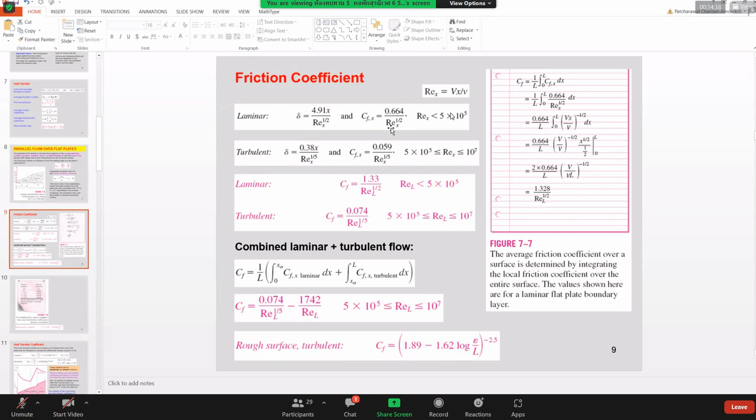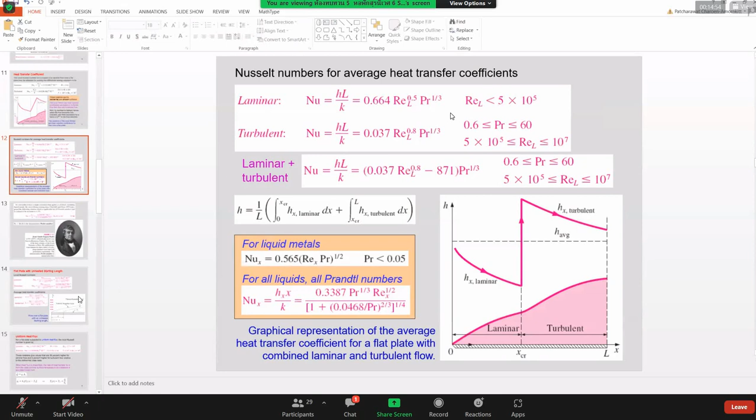The content today, I don't think is difficult, but it contains so many equations like this. Looks complex. I don't think you would like this kind of equation - doesn't seem like a good equation to remember.

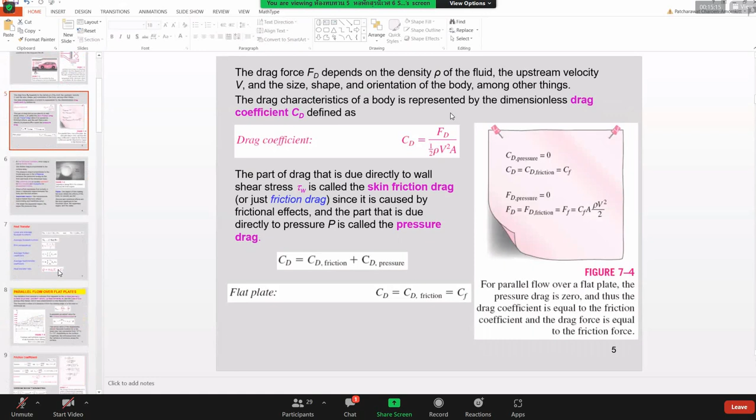And you don't need to remember it. Most of the time, when we face this - talking a bit about heat transfer in my bachelor study - we don't really need to remember this kind of equation because it's not that important. It's not like F equals MA, it's not Newton's first law, second law, whatever.

But it's the kind of empirical formula you obtain from experiments. And if you recall, I think I gave you some exercises in MEMAT to fit the experimental result to this kind of equation, to obtain the exponent and the coefficient here. It's all obtained from fitting. And if you can link your idea from MEMAT2, you will know that this is regression analysis - that's how they obtain this equation.

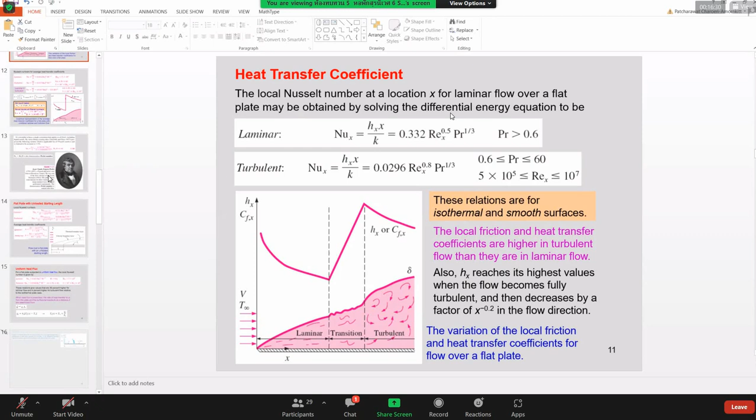I will talk more a bit about them, but just leave it here at this moment. I think you don't need to remember it because it's from experiment, and there were so many empirical formulas out there. In this book or in this lecture, we just pick a few of them.

We introduce them to make you able to know how to utilize it. It's not really important about the exact number, like this being to the power of 1/3, something like that. Because if you do research, get into your master study or PhD study, sometime you will be the one who creates this kind of relation and publishes it to the public. So studying in master's degree or PhD is about providing some solution to the public, and this is one solution that they found.

They obtained it from careful experiments, trying to help you who don't have the experimental apparatus yourself, to be able to carry out analysis about heat transfer. And it's very unique to the problem, like this flat plate with an unheated starting length. So this equation works only for this kind of problem. You cannot apply it to something else, like cylinders. No, not like that.

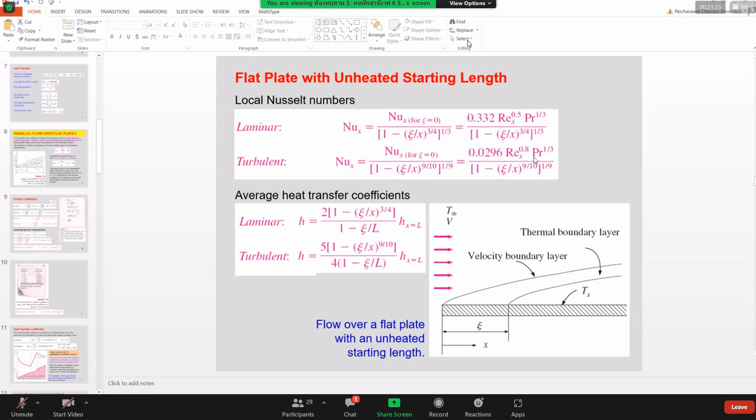Still, it's really popular if you want to study as a master's or PhD student. Maybe one day, 50 or 100 years from now, your surname will be on a book like this, and everyone will know this is the relation from - I don't know, let's say it's the 'Suryo relation,' something like that. So maybe you want to register your name into the book. I don't know.

Okay, let's come back to the topic we want to learn today: external forced convection. External, so not internal - it's the opposite thing. You may know external flow, right? Here we deal with external flow together with forced convection, so that's why we call it external forced convection.

The real-life application we can think of at this moment would be turning on your fan and putting it against you - there will be a wind that flows over you, right? That is forced convection, and it's external flow over your body. Okay, let's do it.

What we want to learn from this chapter is, first, we should be able to distinguish between internal and external flow. I don't think it's so important for you guys because you already learned fluid mechanics last semester, so I'm pretty sure you know what internal and external flow are. Based on the previous session, I understand you remember fluid mechanics really well, because there were no questions at all.

So I'll talk about it just a little bit. The objective is also to get an intuitive understanding of friction drag and pressure drag, and then look at average drag and convection coefficients in external flow - this is very close to fluid mechanics. Then we evaluate the drag and heat transfer associated with flow over a flat plate for both laminar and turbulent flow. Here we deal with heat transfer already.

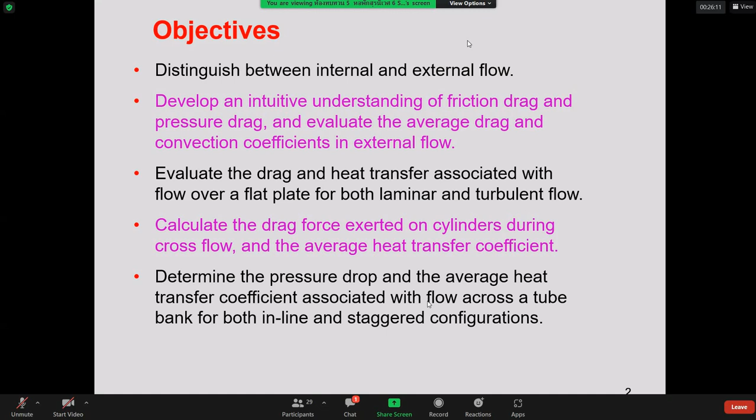Okay, so now let's start. We know that we encounter or face a lot of flow that flows over a body. It's very frequently occurring in practice, and in such cases we have drag force—we have to face a drag force. We are also facing something like a lift force, which is the upward force that makes the airplane fly.

But then, as you can imagine, in this kind of geometry, how could you make an analysis? Of course you need to use numerical experimentation, right? Because if you do a real experiment, you need to create the airplane, maybe a smaller size, but still you need to create something and do the experiment, and you need the experimental apparatus to do that. And that is kind of costly.

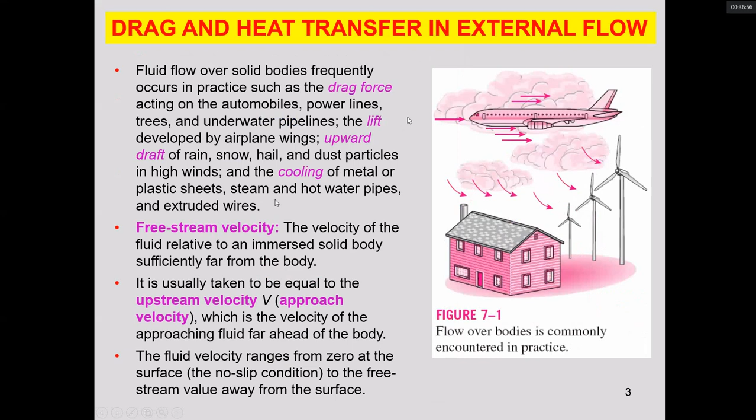So here is how you calculate for the drag coefficient. If you have the experiment, you measure the force. You cannot measure the CD directly. This is the way that you need to think about your experiment: you cannot measure CD, but you can indirectly calculate the CD from the force that you measure. So here is basically 1, 2, 3, 4

different parameters that can influence your CD. So if the FD is the measured value, the error could happen due to the experimental apparatus or the accuracy of the apparatus. Again, for the rho, this is very important. As you know, the rho or density changes with the pressure, with the wind speed. If the wind is too strong, the pressure changes. How could you deal with it?

So there are so many parameters that can influence the CD, and also their surface area. I don't think measuring the surface area is simple—not something everyone can do easily. It requires some sophisticated method to measure the frontal area and put it here. The frontal area is okay if you have the drawing in CAD software—you can probably do the analysis and obtain the A easily. But to measure it experimentally, I don't think it would be that easy.

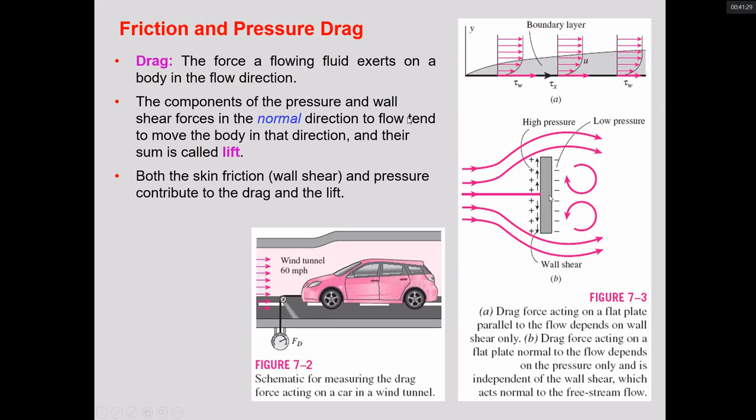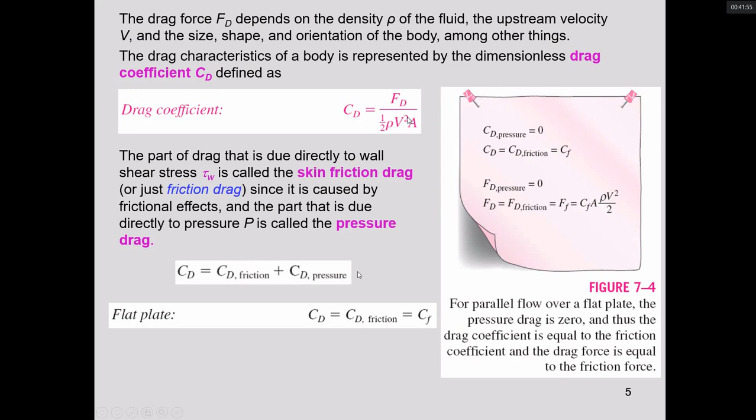For low Reynolds number, most drag is due to friction drag. Friction drag is proportional to surface area. The pressure drag is proportional to the frontal area and the difference between the pressure acting on the front and back of the body. Pressure drag has a really high impact when you have a blunt body like this.

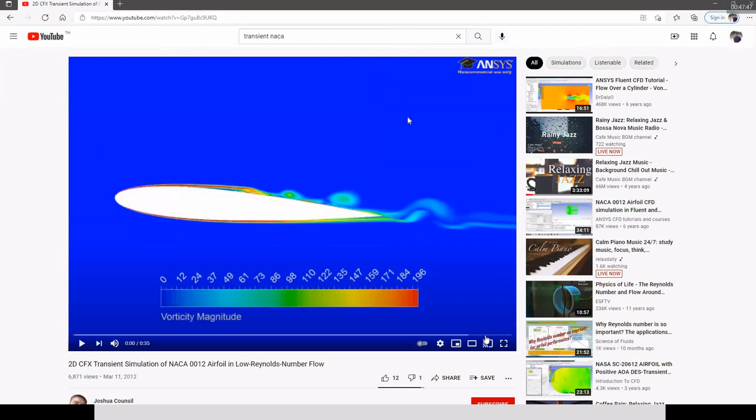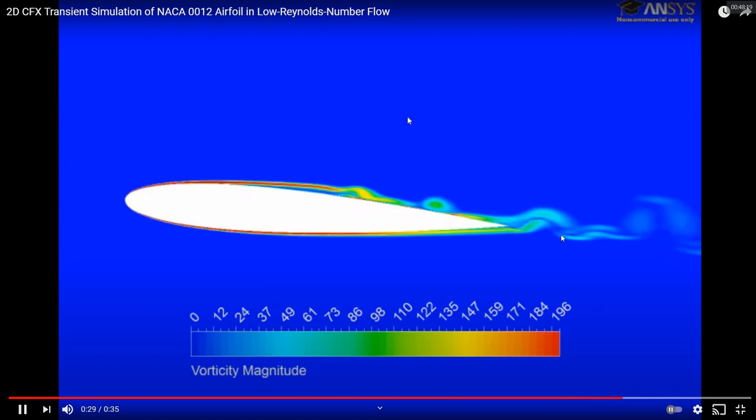Okay, so yes, this is the one — I did something like this. You can simulate this kind of thing, the flow generated here. So this is actually the wing of the airplane, but this isn't so interesting in my opinion because the speed of the flow is very small.

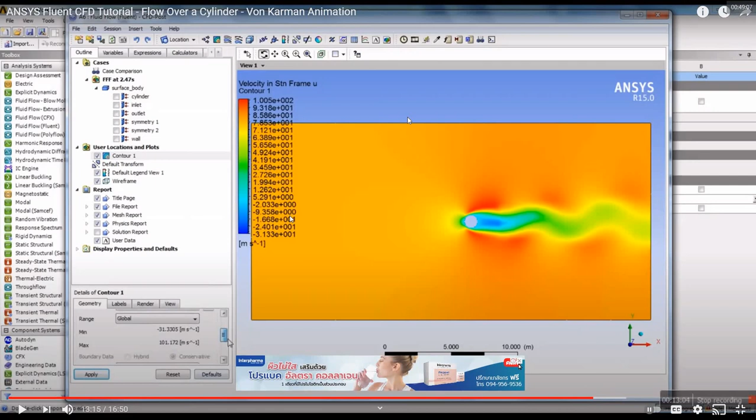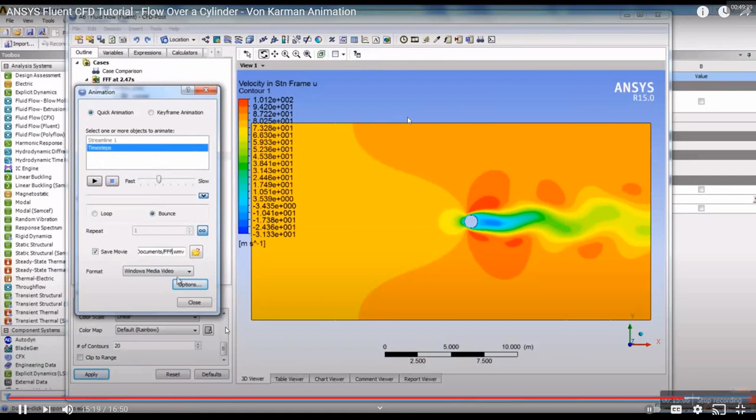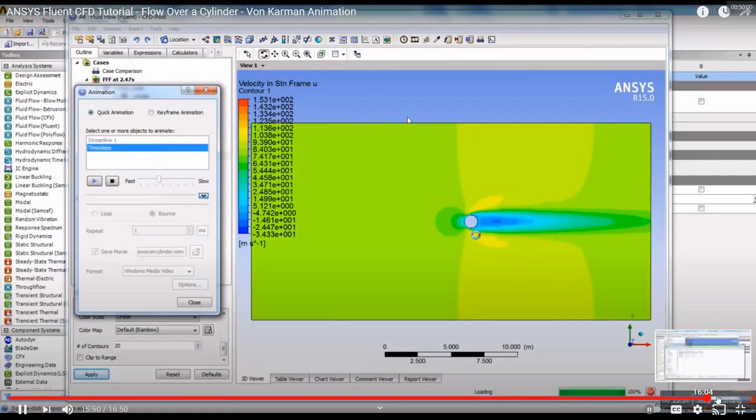I'm not sure if they have an animation or not. Here we're going to do the same thing — after 3 seconds, we're going to reduce the number of contours. Click on animation, then click on time steps, and you can change it. Hit play and it'll start saving each frame. I already have a movie there called 'low', so we'll hit play — contour 1 loading — now it's loading each frame and saving it as a WMV file. If you stop it or wait for it to finish, you can go into this folder and find the movie file. I'm not going to wait for this to show the finished animation.

And it is like this. You can see here, so it's a very interesting phenomena for me, this effect. I stopped the simulation after about two. So maybe, since you already have ANSYS on your computer, maybe you can do it by yourself.

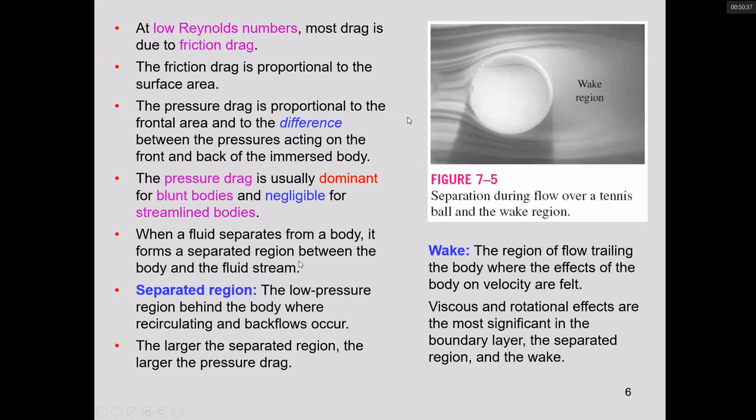Just make a search, learn about it a little bit, and try to do it. You will learn more about the things that happen in fluid dynamics. Okay, so now we start about the heat transfer.

The heat transfer, of course, we have the Nusselt number. I'm not sure if you remember the Nusselt number or not, but the Nusselt number is the ratio between the heat transfer coefficient and the heat conductivity, right? Not sure if you remember, but we learned it last time.

As you can see, most of the time the Nusselt number varies along the surface, which is why this is a relation of x. But this is for the local Nusselt number, so we have the Nusselt number as a function of x, Reynolds number, and Prandtl number.

But then most of the time, if you look at publications, meaning academic articles... I can't remember already if I assigned you guys to find an academic article this semester.

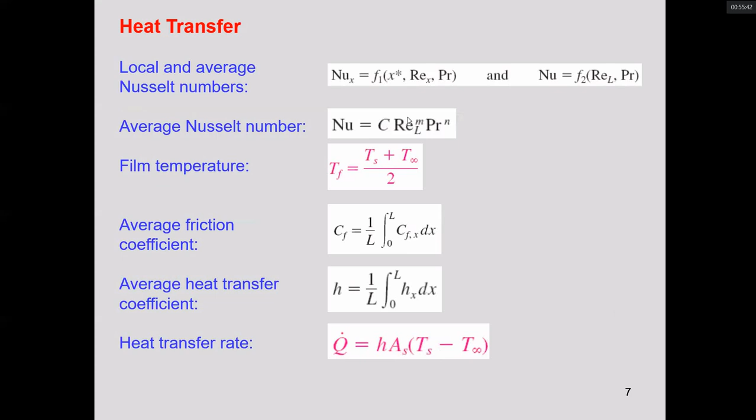So now we have a flow that flows parallel over the flat plate. They're talking about a transition from laminar to turbulent, and I think this means the distance used to turn from laminar to turbulent. That's what they are talking about.

So it depends on surface geometry, roughness, upstream velocity, surface temperature, and type of fluid. There are so many things going on, so many parameters that can influence whether the flow is laminar or turbulent. The parameter used to indicate this is usually the Reynolds number.

And the Reynolds number here is the local Reynolds number, because it depends on x. And it's generally accepted that the flow will transition from laminar to turbulent. No, not exactly 'turn' — it means the point that we can consider, from now on, as turbulent.

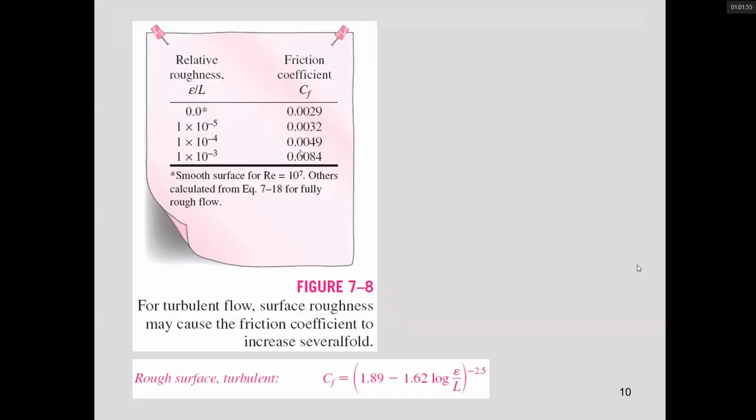So now we have the C of X. We perform the integration in order to get the average friction coefficient, and we end up with the friction coefficient like this. This is the average over the laminar region and the turbulent region for the flat plate.

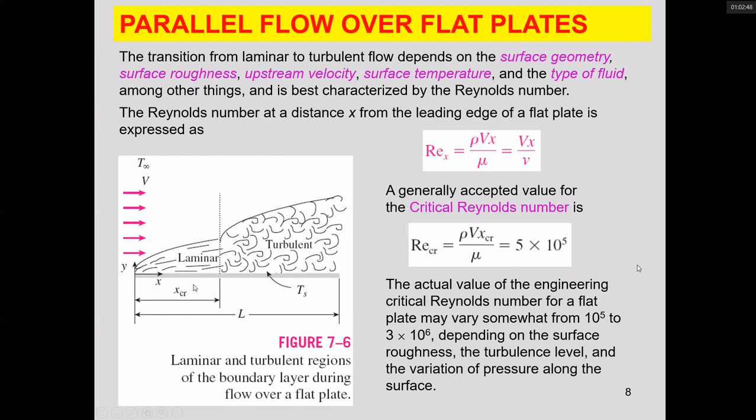If you don't have a problem here, we can skip to here. We can also find the combined frictional coefficient of laminar and turbulent flow by performing the integration starting from 0 to the critical region - do you still remember the critical region? It's where the Reynolds number equals this value. So we perform the integration to that point, then perform another integration and add them up to make the average, ending up with this relation, which is the friction coefficient average over the entire plate.

This solution is really unique, because not every application has to consider both laminar and turbulent flow, but because the plate is way too long, that's why we need to consider both phenomena.

If the plate is not so long, very short, you could end up with only laminar flow or only turbulent flow. You can see that in this relation, it will reduce to this - this only happens when the Reynolds number is really high, when the critical region is very small. So it will reduce to this one, which resembles this part.

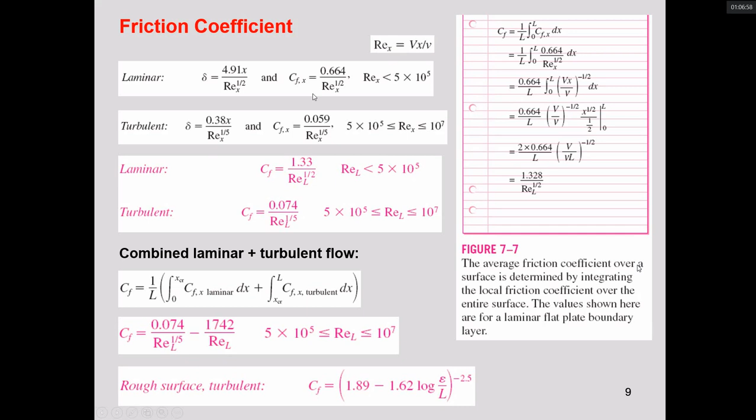Okay, now because we know how to create the frictional coefficient, we move a little bit to the heat transfer coefficient. Some people performed the experiment and found that the local Nusselt number at location X can be determined using this equation. It depends on the Reynolds number at that point. Using this, we can calculate the local H at that point. As you can see, the local H varies along the flow direction.

The turbulence is the same, but here you need to not only look at the Reynolds number to see if it works well, you still have to check if the Prandtl number of the problem you are facing is right like this or not. So, this is for the isothermal and smooth surface.

Then, of course, you perform the integration, just like before, and we obtain the average value of the Nusselt number so that we can simplify the problem. Then we have the H, the average one. This average H will be put into your equation, Q equal to HA delta T, to calculate the heat transfer.

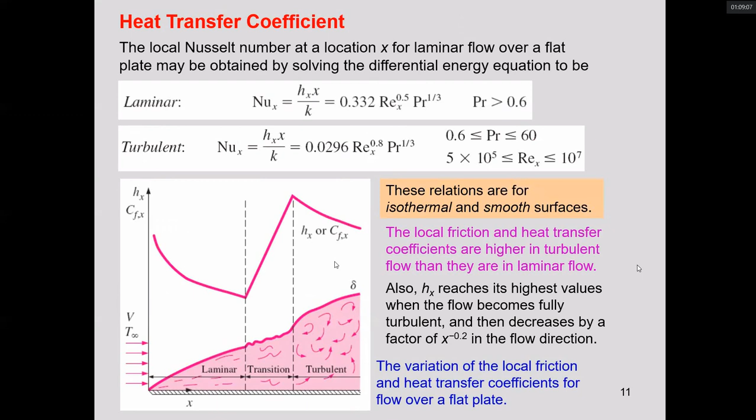And this is the same. We perform the same procedure with the friction coefficient by integration in both laminar and turbulent flow, and obtain this equation. We obtain it from something like this. And then they also provide some other relation for the Prandtl number starting from 0.6.

But then if we consider some other fluid like a liquid metal, when they flow slowly, and you already have the heating surface connected to the metal, you will see that they transfer their heat very quickly because of their K, the heat conductivity.

So we need some other relation that is not the same with other fluid. And we found that for the liquid metal, the Prandtl number is pretty low. Actually here it's the Peclet number. So the Prandtl number is low.

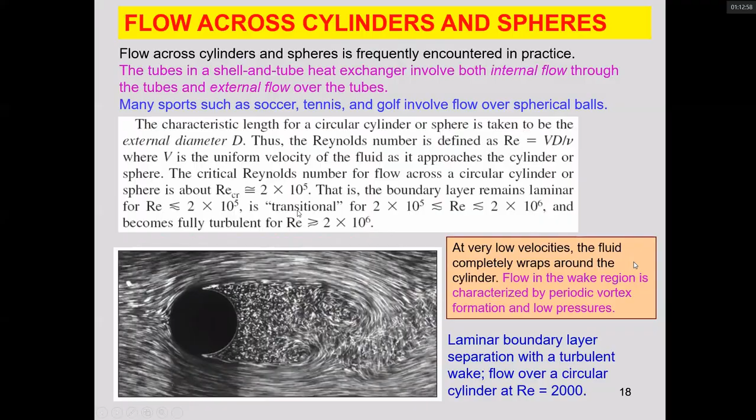I think this is the last slide. Okay, last two for the thing that I want. Where is it? Where? Okay, it's back.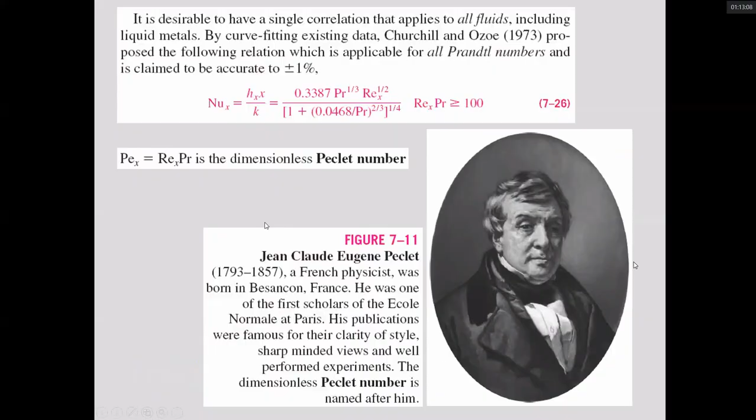All right, so because just now we only limited our consideration to the plate that has a uniform distribution of temperature, and there is no unheated starting length. This, I think it's called zeta, right? Zeta, something, I'm not sure how we call this Greek letter. Maybe zeta, pronounced by the Z here. Okay, but whatever, I'm not sure if it's correct or not, just forget it.

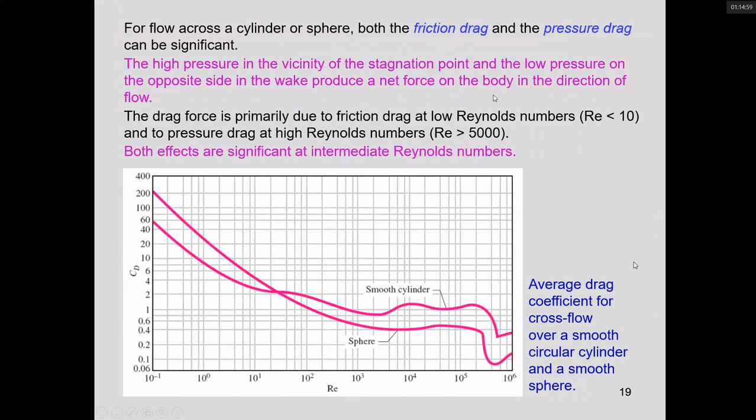Now, because we considered the case for a uniform surface temperature, they extended it to another boundary condition. This condition is a uniform heat flux. So instead of holding the surface temperature constant, we hold the heat supplied on the surface constant. It's different, and it leads to a different equation.

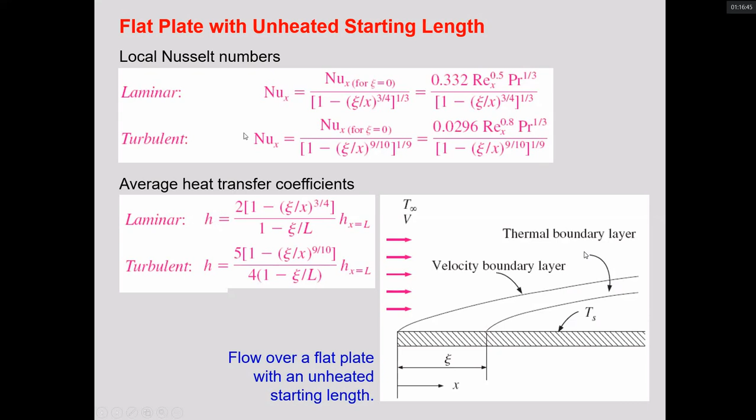But that's not so important. The whole idea of learning all these relations is that once you obtain the Nusselt number, you calculate the h, and then you supply the h into our calculation. It's all about finding the h.

Okay. Any question before we start to do some exercise or see some example? No, nothing. Cool, good then.

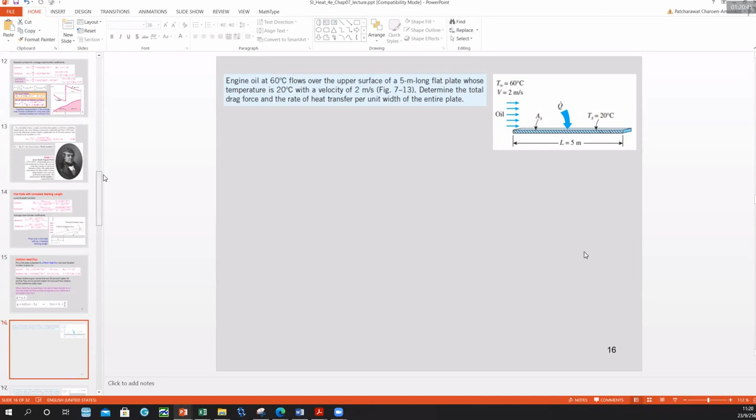So now we have to look at the frictional coefficient. They say it's the total drag force and the rate of heat transfer, so it means in total, on average, something like that. It means we need to use one of these equations for the drag.

You still with me, right? And then you need to check if the oil falls close to which Reynolds number range, and then we utilize that one.

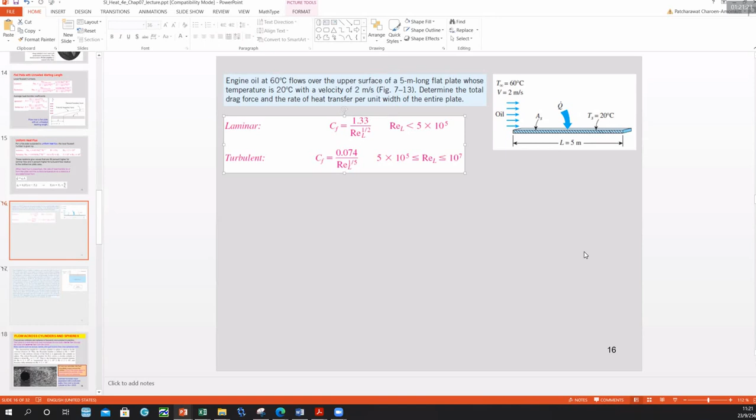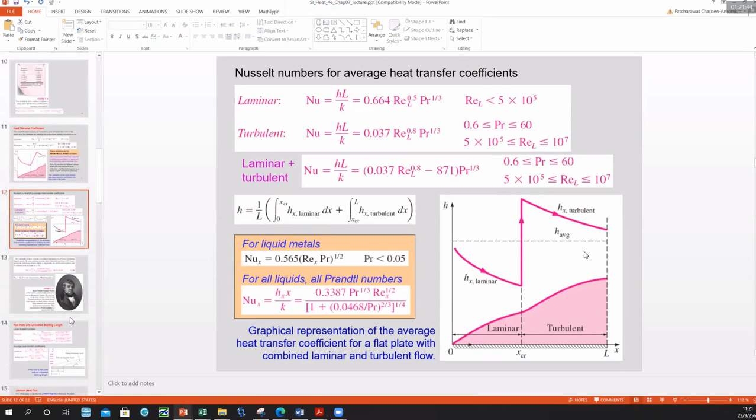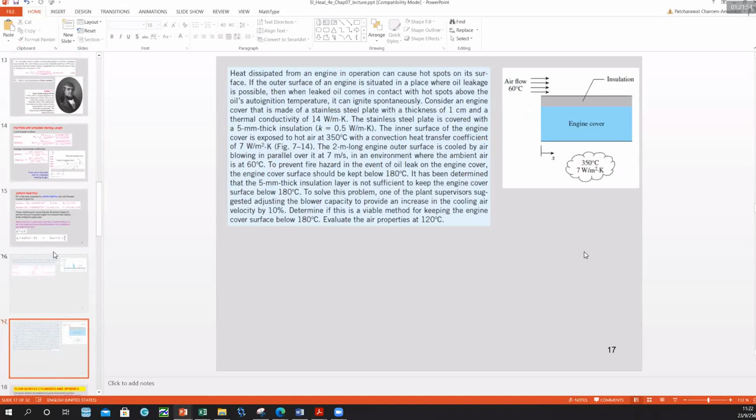And again for the Nusselt number, so Nusselt number starts here. Probably this one, I'm not sure, or maybe oil can be treated using this Prandtl number relation, I'm not sure, or maybe we utilize this one. I'm not sure as well. But there are so many relations here.

First thing, you need to check the properties of the oil. Here, the film temperature is the one we will use to evaluate the properties of the engine oil, not at 60, not at 20, but at the film temperature. And the film temperature is the average between the two, which is 40. So let's go look at the back of the book and see the table.

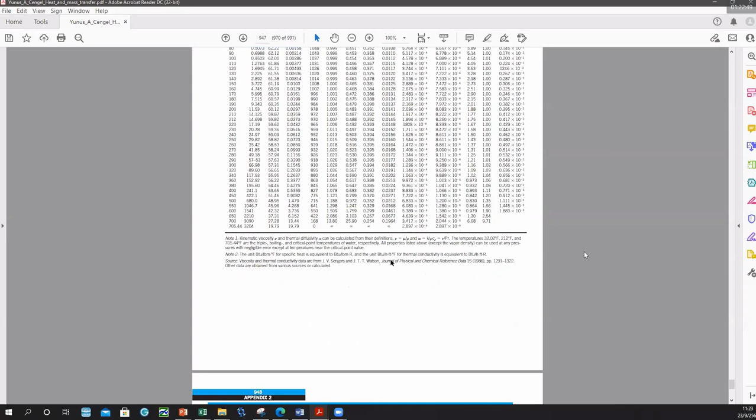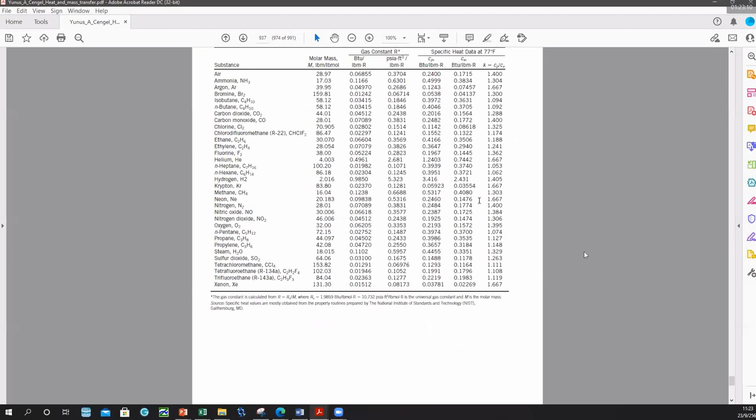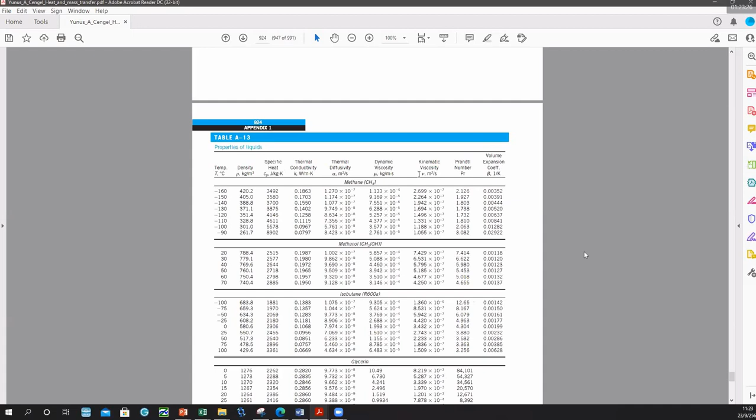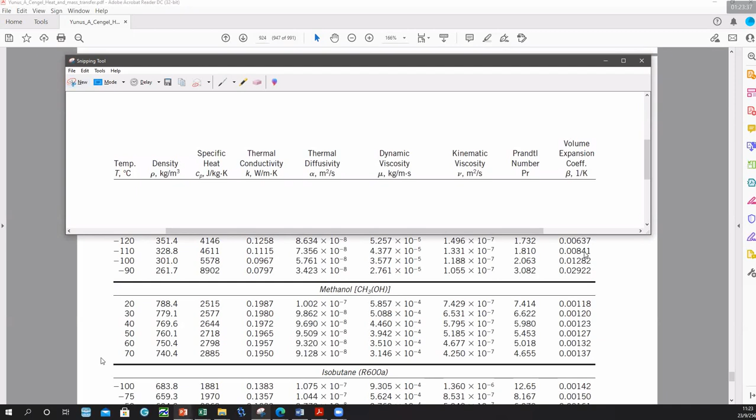Okay, so now we have, here is the British unit table. Just now it was 13. Here is the property of the liquid, right? And you can see this is the thing that you can obtain. There are so many things, let me copy it down.

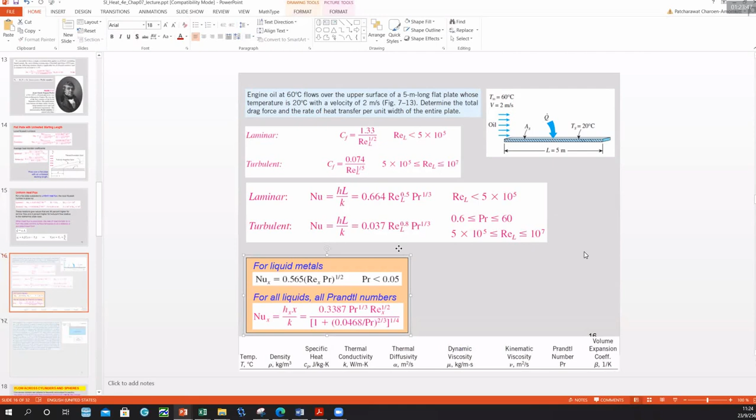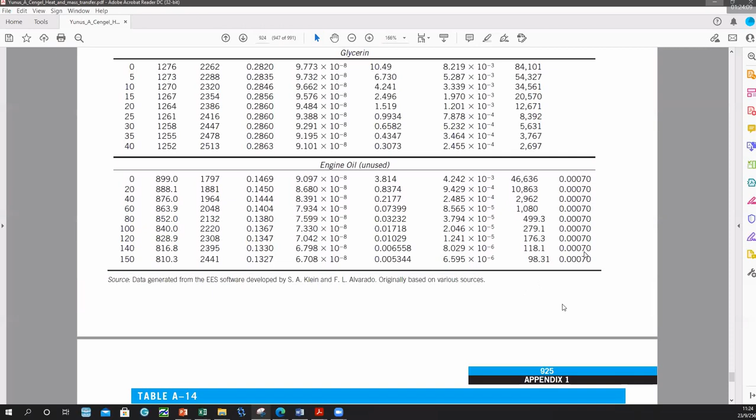And then we evaluate it at 40 degrees, like this. So luckily, everything is here. Let me delete all of this first. Luckily, we already have the information about 40 degrees here.

Let's say if the film temperature is not 40 but 55, what would you have to do? Interpolate. Of course, yeah, interpolate, right? You are correct, just like that.

So now we can, where is it, this one, right? So now we just need to extract the values that we want for our calculation.

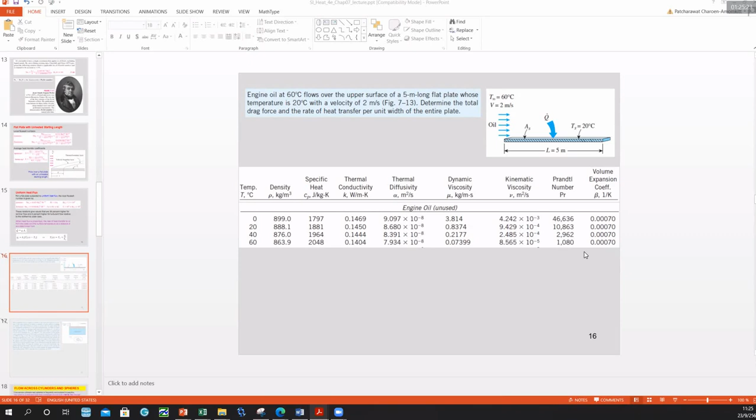Okay, so as you can see, let's say for the friction coefficient, you need the Reynolds number. So you need the Reynolds number, which means you need the Reynolds number relation.

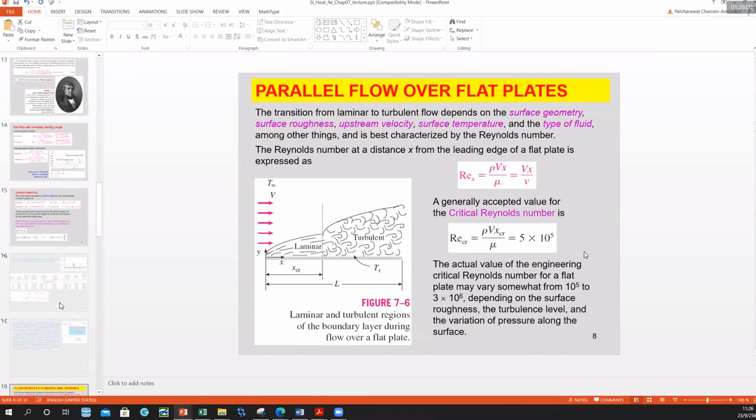Like this, right? But this is the local Reynolds number. It's not so different. We just utilize the characteristic length. In this case, for the flat plate like this, characteristic length is 5, it's the length here.

So now what you need to have is the rho, right? Oh, you don't need it. Maybe the velocity and the kinematic viscosity, and the L you already know. So the V is here, which means that, let's wrap it up. For the Reynolds number, we have the V, VL, and the nu, right?

Not this one, this is epsilon nu. So V, which is 2. We have L, which is 5. And we have the nu, which is 2.485 times 10 to the power of minus 4. Okay, we're good now.

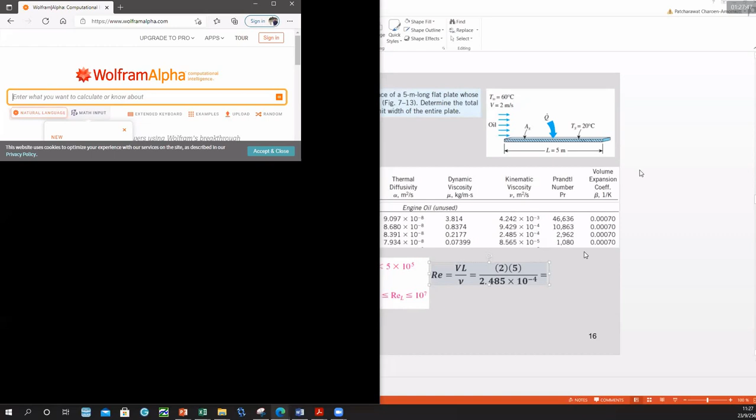So just do some calculation. Wolfram. Okay, so 2 times 5 over 2.485 times 10 to the power of minus 4. Then you have, oh sorry. Okay, now we have 40,000, right? So just now, 40 something.

Teacher, can I ask you something? Yes. I'm wondering, the nu, right? We use for the 40 degree, right? Or 60 degree? Like the smaller one. Okay, you mean the nu, right? New. Yeah. It's a Greek letter. And which one, 40? Yeah, you should evaluate everything that relates to the fluid using the film temperature, which is the average between these two values, 60 and 20, which is 40. Okay, I got it.

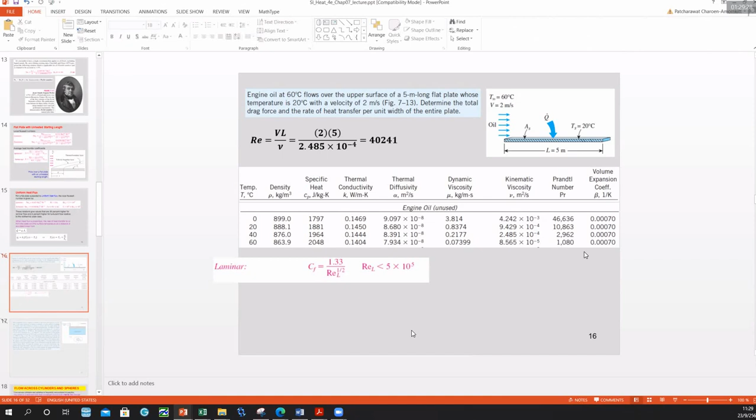So now you see that the Reynolds number is laminar. Right? This is pretty simple. I think we still need to utilize it later, but okay.

We need to find the friction coefficient first. Friction coefficient. CF equal to 1.33. Then, oh no, not this one. No, okay. Reynolds number L to the power of 1 over 2, like this.

So it's pretty simple because we only need to substitute the Reynolds number into the equation. So 1.33 over, oh sorry, oh no, not like that. Okay, and then to the power of 1 over 2. Oh no, again. Why do I have space all the time?

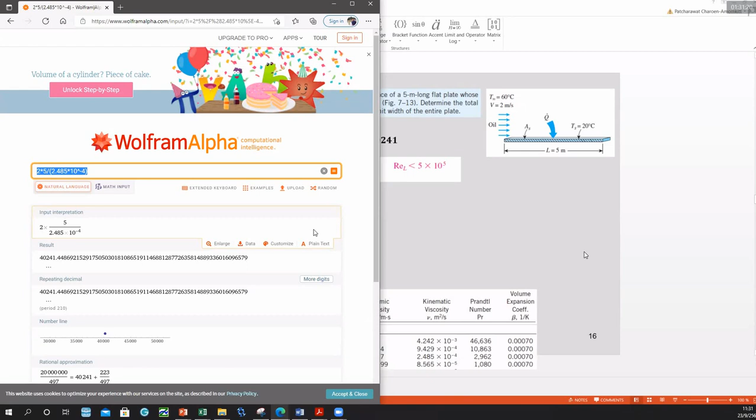Okay, then you just use 1.33 over 40241, and power of 1 over 2. Okay, this is the result. That's it for the first question.

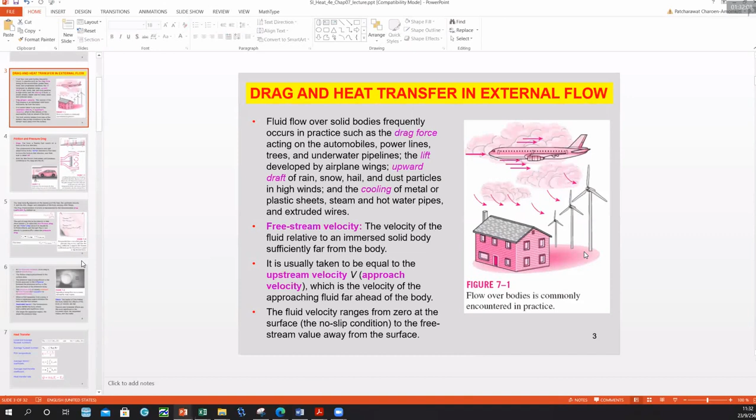For the second question, oh okay, drag force, right? Drag force, we need to utilize drag force. Okay, it's the same one, the same equation. I think they didn't put it here, but yes, it's actually the same equation with this one. Ah yeah, right. Let's do it.

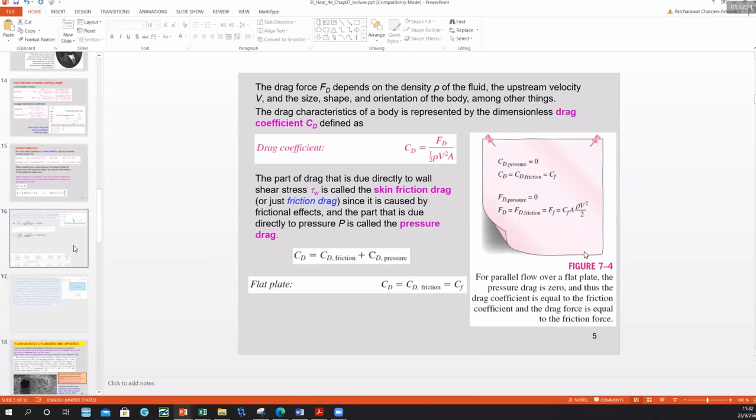Drop a bit. Okay, so now we need to find, here is the average friction coefficient. So now we are trying to find the drag force. FD, right, equal to CF. Actually, I love to express it. We have frontal area, and we have, because we use A here, and V to the power of 2, like this.

It's just a drag force, so we just utilize CF. And then we have A, which you can, I think, because they're talking about the unit wide, right? Which is 5 times 1, so just 5. So just consider that only a unit of length at that area. So then we have a value of 876. And then V, right? 2 to the power of 2. Okay, so now we can calculate both.

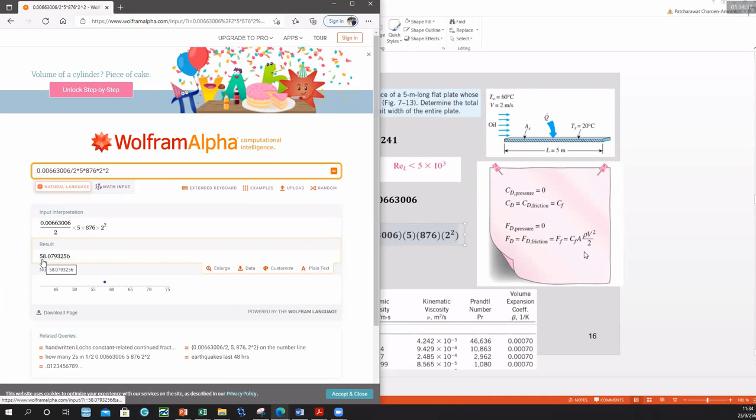Times 5 times 876 times 2 to the power of 2. And here is the answer. Okay. All right.

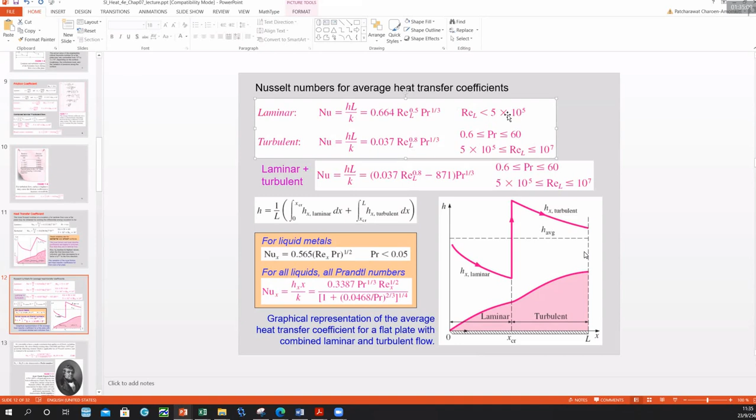Now we need to find the Nusselt number. So we know that the flow is laminar. This is pretty simple. We just utilize the laminar relation here. Laminar relation. Then what you need in the laminar relation.

I like this. So we have the Nusselt number, which is h times L over k equal to 0.664 times the Reynolds number to the power of 0.5. And then times the Prandtl number. Prandtl number at 40 degrees is this one, so 2962 to the power of 1 over 3.

And then we have the K. K at 40, which is 8 here. Am I correct? No, sorry, here. 0.1444. And we have the L, which is 5.

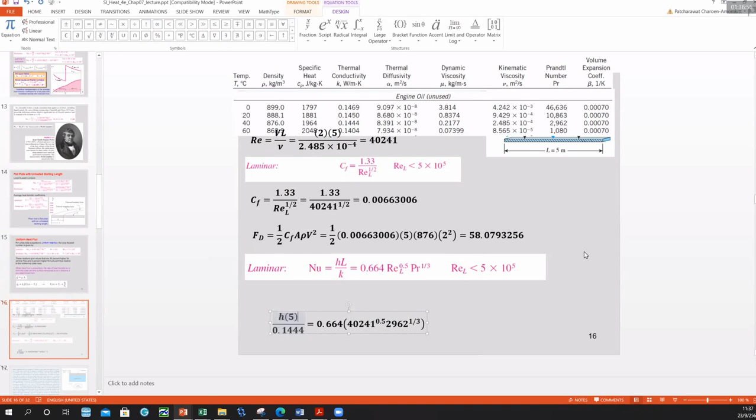Okay, all right. I think everything is solved for the H. No, H is a unit. No. Let's call it X. Okay, so X equal to this value.

Okay, then we need to evaluate for the rate of heat transfer. So it's just Q dot equal to the average heat transfer coefficient times the surface area, times delta T.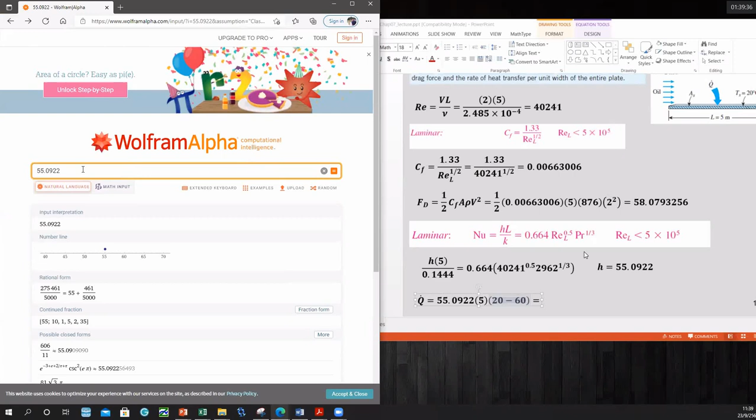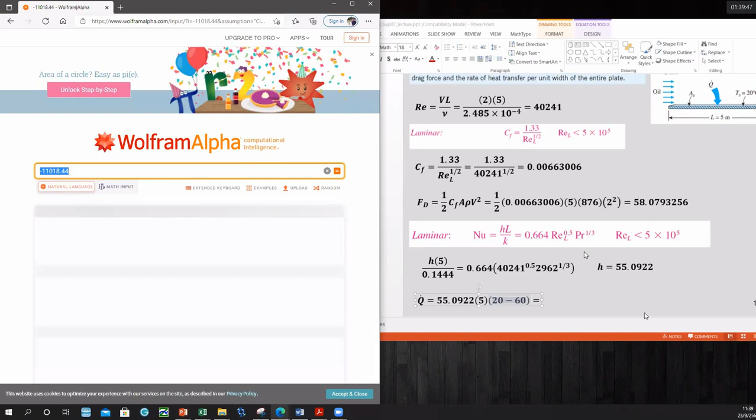So now, time it by 5, time it by 20 minus 60. So this is the answer for the first one. So here is the answer. Here is also another answer.

Okay, any question? No? Pretty simple, right? So the other one is also the same, but requires some idea.

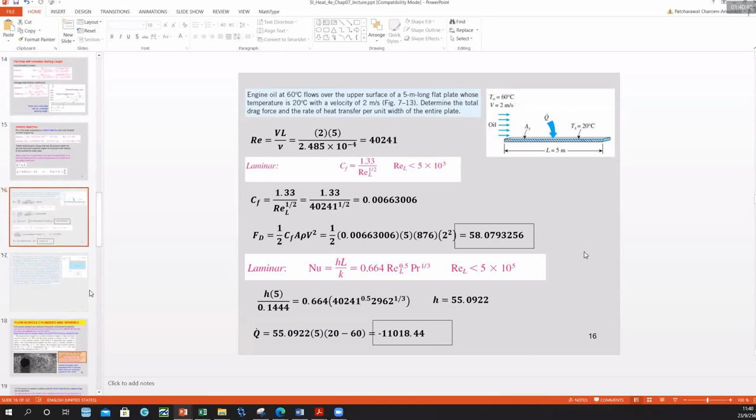I think if you have a look at the textbook now, you will know what I want you to do. So please take your time. I think we have about 90 minutes. Please try to complete this by yourself. Okay, I will stay here. If you have any problem, just ask me. But please try to do it by yourself. This one. Okay.

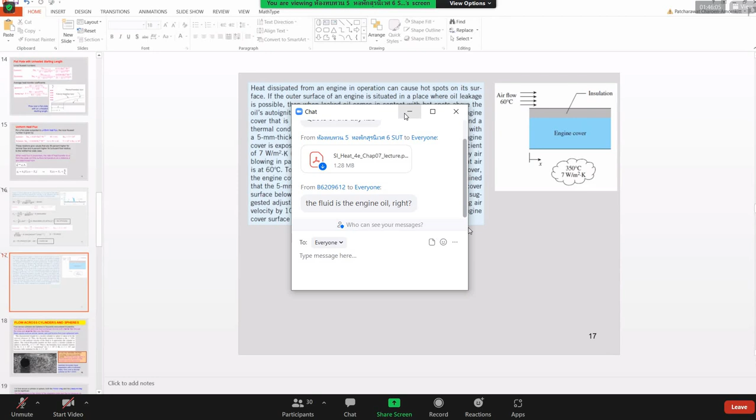No, no, no, no, no. Airflow here is the cover of the engine, and here is the inside. Okay, so if you read until here, they will say that the plant supervisor, an engineer, suggests that maybe they should increase their blower capacity to increase the flow rate. So they can have the temperature below the point that they want.

So basically, it's just air cooling, just like turning on a fan in order to remove the heat, so it's not engine oil. But you will see that this is quite tricky because at first they provide you the velocity of 7 meters per second, right? But here, if you read to this point, they say that the supervisor suggests to increase the air velocity by 10%. So the value that you use should not be 7, but something bigger by 10%.

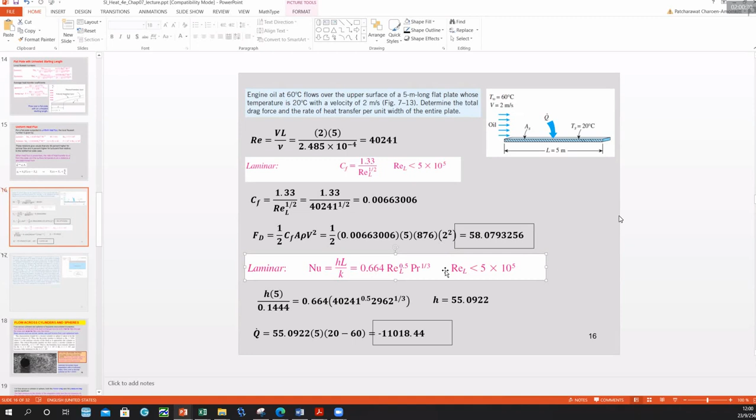And that could be achieved using this relation, this kind, not exactly this relation, but we should utilize this kind of relation to find the h. But then you will know which equation to select by calculating the Reynolds number, and the Reynolds number here needs to be calculated from 7.7 meters per second, because here the supervisor suggests adjusting the capacity to increase the velocity by 10%. That's it. And if you are able to find the h, I think you will have no problem solving this problem.